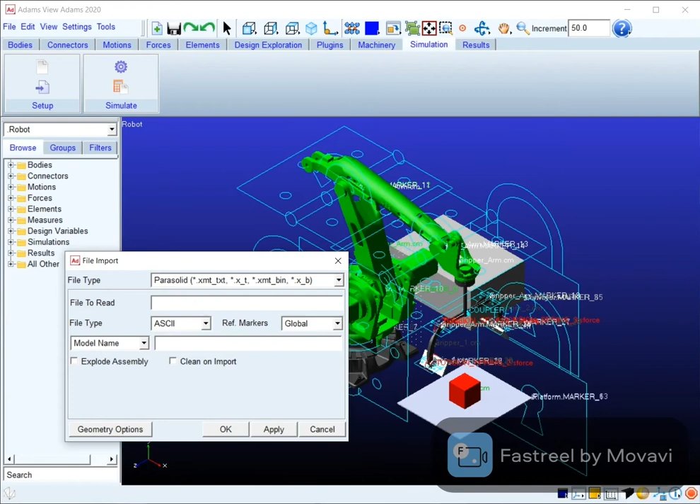So how did we import? We simply select file, then select import, and the file type should be Parasolid. Basically, the file on SolidWorks was saved in the Parasolid format. So here we will import the Parasolid format. It is much easier to use the Parasolid format. So here it was the robot assembly which we imported in Parasolid format. We have already done that.

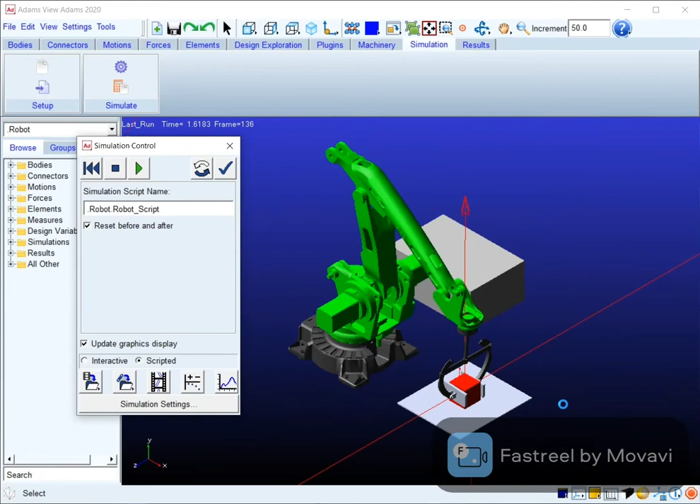So before moving on, I'm just going to show you how the simulation works, and then we'll see each individual procedure which we took to achieve this simulation. So here's the simulation. It's basically a pick and place robotic arm with four degrees of freedom. It picks the box from a platform, drops it onto the conveyor belt, and returns to its original position. So you can see the movement of each individual component. So we'll start with how this actually works.

So before starting anything, we have here the bodies which we can easily see. They were built on SolidWorks, so we don't have to build them again, which makes our work much easier. Before moving on, we just have to select the material for each individual body part. From here, we right click, modify and select. We have already selected steel. The whole robotic arm will be of steel material. We do this procedure for each individual body part here: gripper, lower arm, upper arm, swing, gripper arm.

After this procedure was done, we move on to connectors. Connectors are an important part. When we developed this assembly on SolidWorks, we didn't establish any joint connections between these bodies. Joints tell you about the degrees of freedom with which your object will move. We have three ground joints, which ground the base, the conveyor platform and the platform on which the box is lying. You go into connector settings and select create a fixed joint, then pick a first body and a second body. For example, the first body was the platform, the second body was ground, and the type is fixed. That was joint 1; joint 2 and joint 3 are also grounded joints.

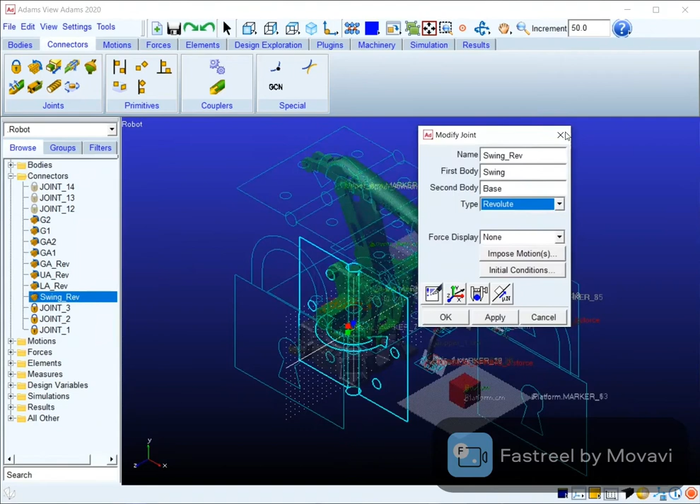Then moving on, we need revolute joints. Like in the simulation I showed you, the swing was rotating about the y-axis and the arms were rotating about their axes, so we need revolute joints for this. We select create a revolute joint, like we did for the grounded joint. We selected swing rev: the first body was swing, the second body was base, and the type was revolute. Another was between the lower arm and the swing, then upper arm and swing, gripper arm and swing, and a couple more revolute joints between gripper arm and gripper 1, and gripper arm and gripper 2. So this was done for the individual bodies.

Now we've established the joint, but we haven't described the motion yet. So for that we'll go into motion setting, and I'll show you what we've already done, basically the motion we've set up.

We're gonna select this rotational joint motion, applicable to revolute or cylindrical joints. We've already selected this, I just want to show you how it basically works. This is the joint motion, we named it swing motion, joint was swing revolution, and joint type revolute, which was already default selected.

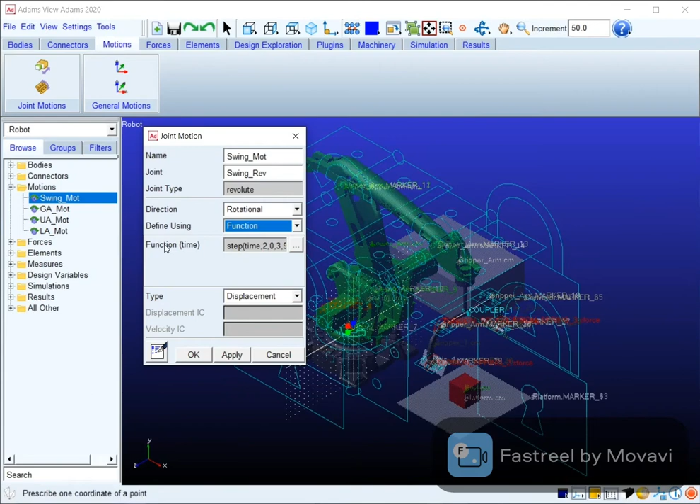Direction rotational, define using the function category. So function name was this. I'll show you how the function is basically selected. We select step category and then click on to assist. Here we have an independent variable x.

So we'll plot our functions, the graph and all that against time. Here we just write time, and it's asking about the time at which it's gonna begin and the time it's gonna end. So we'll write time, for example 0 here, and at what time it will end the motion, at 3 it ends, and the initial value is the function value.

Basically they're asking about the position: what will be the position of your joint at time t equal to 0, and what will be the final position at time t equal to 3. So we've already done that.

You can see here h naught at 0, and x1 as well. Basically x is the independent variable, here we have time, and x naught is the initial time which was 2, and the initial position was at 0, at rest. X1 is the time at end which was 3, and h1 is the final position which we have given, 90.

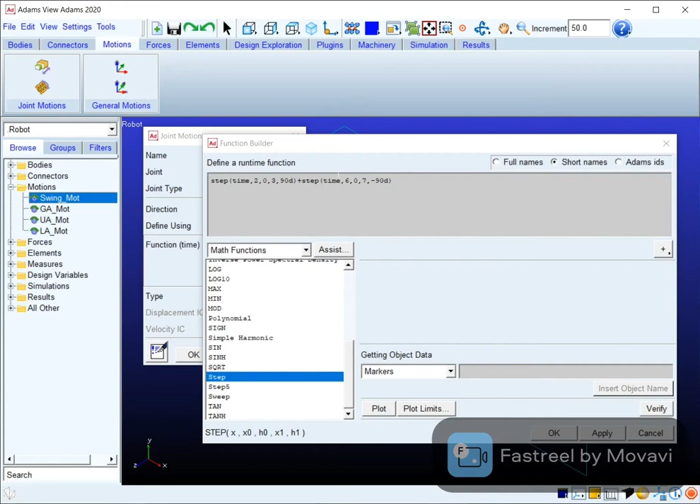This function was basically the swing function here, as we saw earlier how swing was working. Swing was rotating 90 degrees about the y-axis. So this step function was to rotate 90 degrees, and this step function was used to return it to its original position. We've seen how this step function is gonna work.

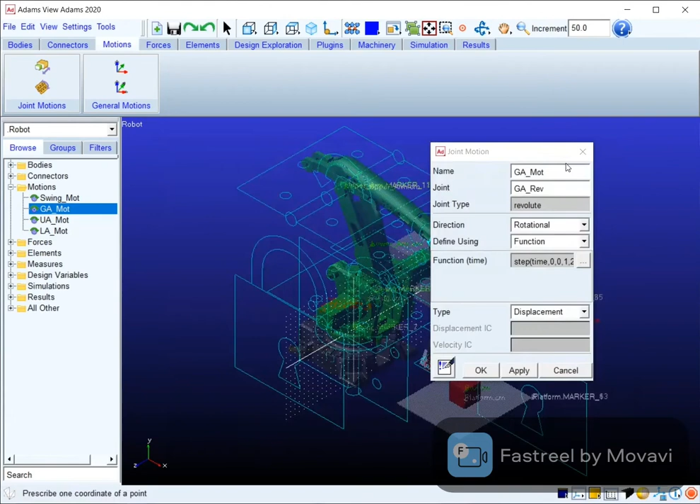We did the same procedure for every other revolute joint. This was the gripper arm revolute joint, so these were the step functions. Basically we gave step 1, step 2, and step 3 to return it to its original position. Similarly, we did this for the upper arm and for the lower arm. So that was it for the motions.

The four motions which we gave: this was rotating 90 degrees, this arm was rotating about this axis. Now you can see the arrow keys which are also depicting the direction of motion. So we've seen bodies, we've seen connectors, how they were established, and how the motion was established.

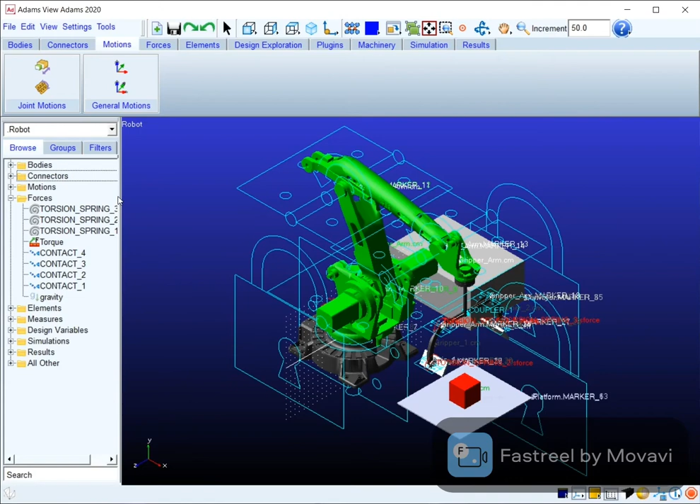Now moving on to a very important part, the forces. Now we have these four contact forces, one torque, and three torsion springs. So we're going to see them one by one. Basically, the contact forces were required.

We're gonna select force contact. The contact forces were required because the gripper arm, when it grips the box, basically exerts impact forces onto the box. The box in turn is exerting impact force on this platform. The box will be placed on the conveyor belt in the future, which will also act with impact force. So we have to establish these impact forces.

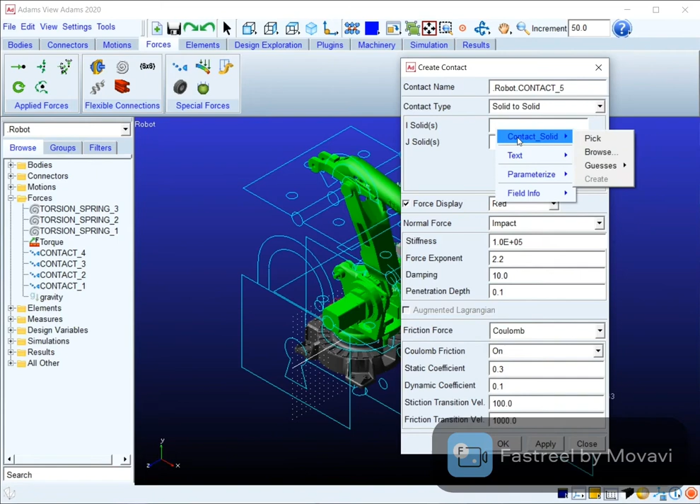So what we have to do, we just have to select create a contact. Here we have a create a contact category, we select the solid to solid type. Basically, we have all the material body parts which are solid. Here we're gonna select the solid part which we want, and another solid body.

I'll show you, we've already done that. This was contact one, which was between solid 27, basically the box, and solid 33, basically the platform. So we basically select solid to solid, the impact, the normal forces impact, and the stiffness.

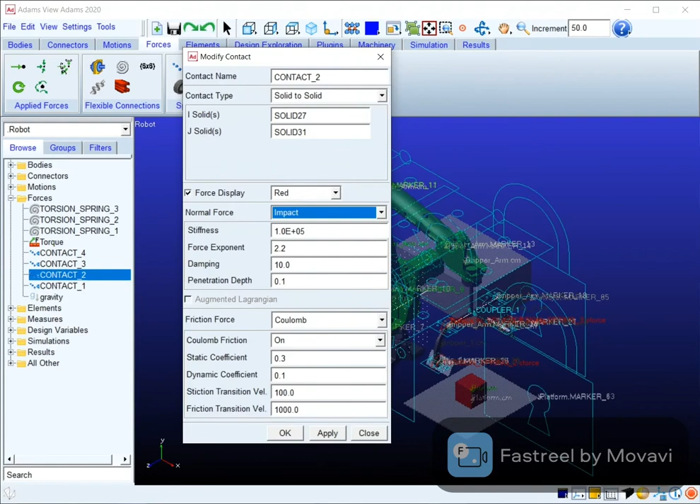These were the values we gave here. Similarly, this was done here again. This is the box, this is the gripper arm shown in white color, and then again the box and the other gripper arm, and the box and the conveyor platform. So this is how the contact forces work.

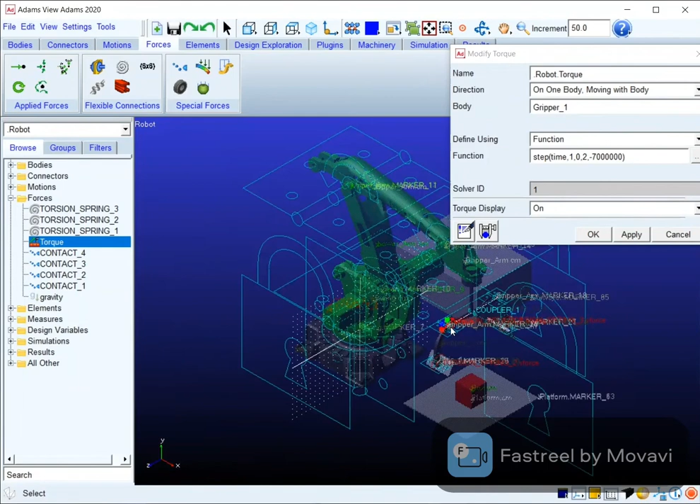Then we establish our torque here. You can see it, let me zoom it out for you. So we have a torque applied here. This gripper arm will be rotating about its axis, you can say the x-axis, and then it will grab the box and place it onto the platform. So for that we have to give the torque.

So here we modify the torque, we have established the torque. However, we only establish the torque for one end, and for the other end we'll use the coupler category. So here we see a coupler category, we just select and modify. Basically, we don't have to apply torque for both ends, we just simply apply torque on one end, and using the coupler command we can also apply torque on the other end. Basically, it acts as a couple.

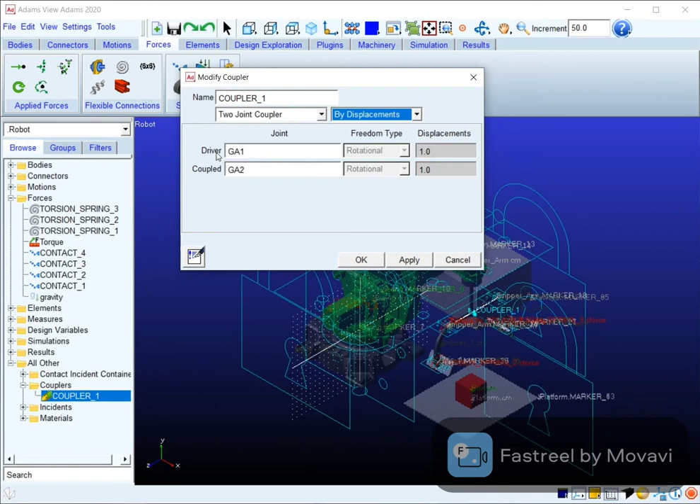When two forces act on a perpendicular distance, they are called a couple, so a kind of coupler acts like that. Two joint couplers were selected here by displacement. The displacement was given. The driver was GA1, about which we applied the torque, and the coupled one was GA2, about which we haven't applied the torque. So this is how the torque category works.

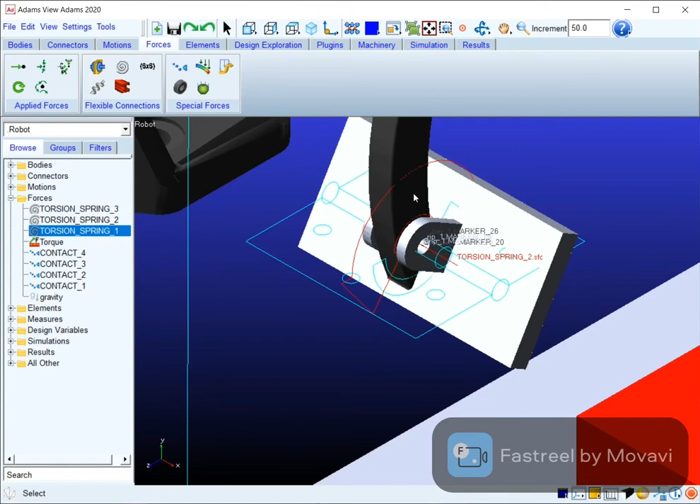Then moving on, we applied a torsion spring to the gripper arm, between the gripper arm and the gripper. Similarly, the torsion was applied between the white plate, for visual impact, and this gripper, you can say our gripper arm. Basically these are grips or gripper arm, we have named them very similarly, so it kind of creates confusion. This is how we established three torsion springs.

So that is it for the forces, and then everything is done. The bodies have been established, and all the conditions have been given. The materials have been selected. On connectors we have given the joints, and for the motions we have established the motions as well, how they're going to move. The forces category is also done. So everything is done till now.

Now we'll move on to the simulation part. For the simulation part, we just select simulation here, and then move on to settings. We already have a simulation report script name. We just want to show how we went about that. Here we select the end time, whatever will be the end time of yours; we have the end time at 5 seconds. Here we select scripted, then simulation script, and create.

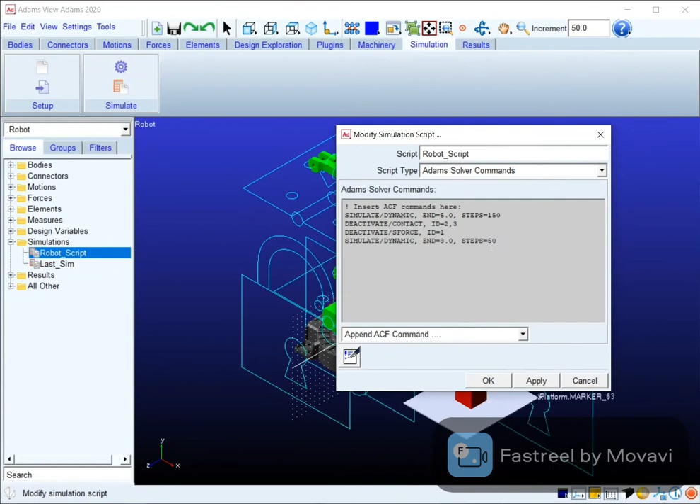So here we have a robot sim script one. We already created the script for the simulation, so we're just going to see how this works. When you open it, the script name you can name whatever, and the script type is Adams Solver commands. So this was selected as Adams Solver command, and from this drop box we selected append ACF command, which you can see here inside the Adams ACF command. Then we simply write the simulate function: deactivate contact, deactivate, simulate dynamic, end time, and the steps. This can be edited according to our own situation.

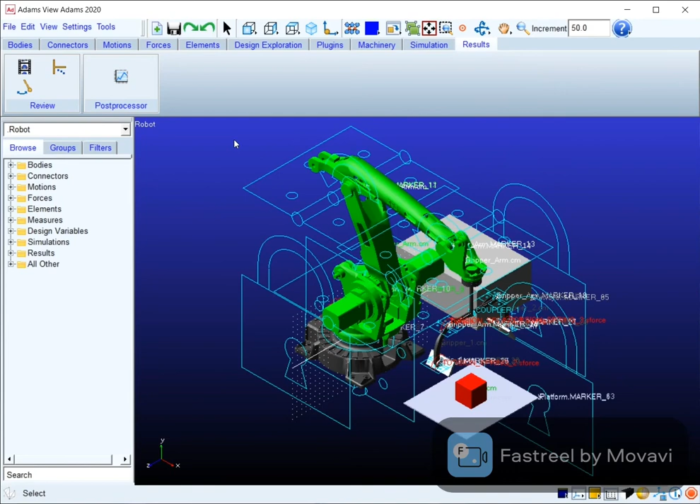However, this was required here, so we just simply put our commands here, the steps and everything. You can select activate, deactivate, whatever command you want. We have deactivated this command, and deactivated this one too, so we simply select this command, and that's how the simulation part was done. Now we're going to see how the results are obtained. We simply select a post processor, or you can simply go to simulate, and here we have a plotting option. Simply select this, and we have a plotting window opened.

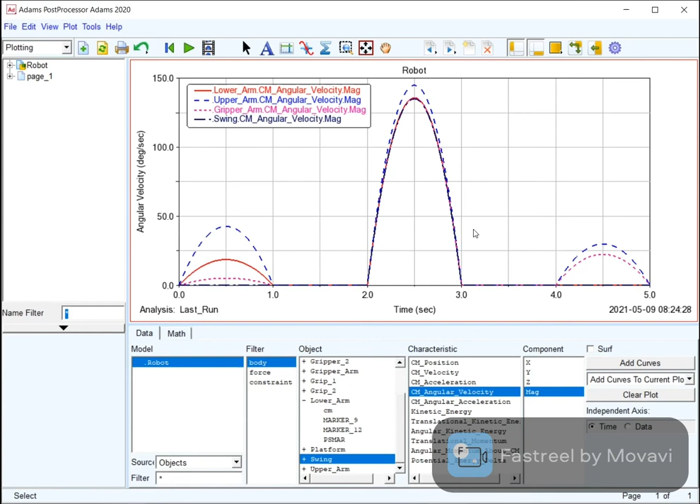I did the same procedure for every component. For example, I've plotted graphs showing the upper arm, gripper arm, and lower arm's angular velocity, angular acceleration, and position. You can also see the x, y, and z values. These graphs were plotted and can be found in the result section of the report. So this was the plot for the bodies.

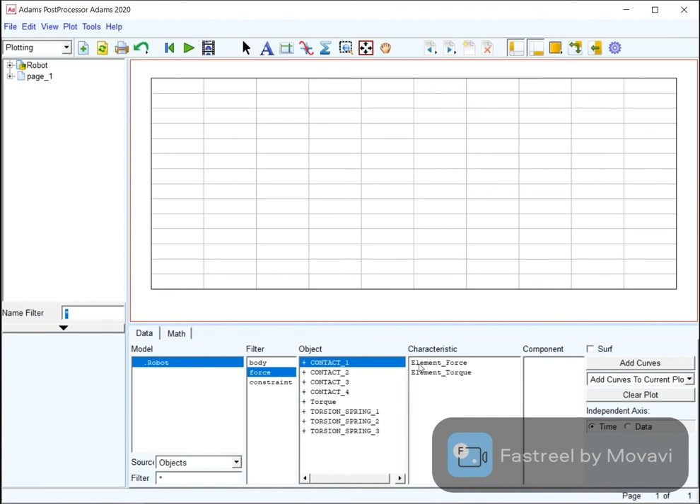Moving on, we have another category: force. If we want to see how the contact force or impact force was varying over time, we select contact 1, or contact 2, and element force magnitude, then add curve. This shows how the force varied with the passage of time. We can plot contact 3 on the same graph, or on another graph if preferred. This basically represents the box and the conveyor.

You can see that until almost 4.7 seconds there was no force, as depicted by the graph, and there was a sudden force when the box was placed on the conveyor belt. There was a sudden force felt by the conveyor belt. All these graphs can be found in the report.

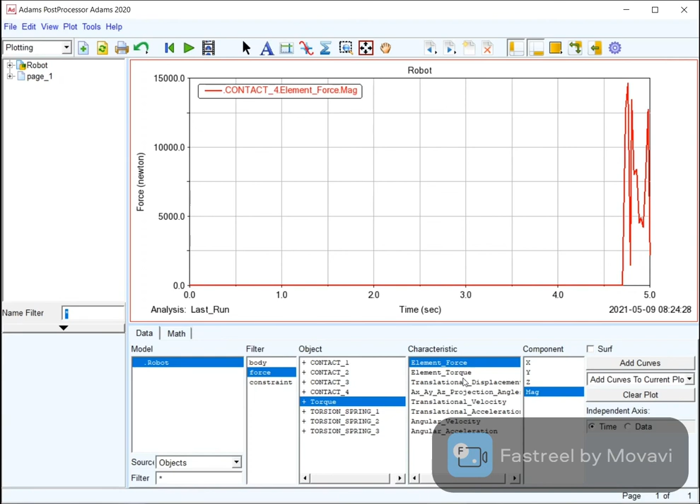Torque was also applied, so we saw how the magnitude varied with the passage of time. This depicts the step function we used to define the torque, similarly for torsion and every other system.

Moving on to the third filter, which is constraint. Here we have many categories, like the motion which we applied on the joints - you can find them here. These are the joints' motion, and these are the motions we applied onto the joint. So I have plotted the graph for motions, for example the angular velocity.

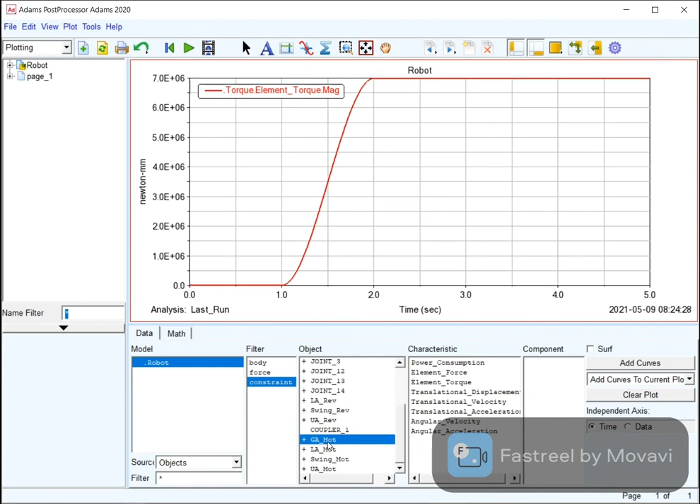How was the gripper arm's angular velocity varying? Similarly, I have plotted the lower arm angular velocity and the upper arm angular velocity. This can be found in the result section.

Yeah, so this is how the plotting was done. Earlier we saw the simulation, and now this was the plotting. This is how we achieved the simulation part on MSC Adams and worked out the software-based calculation of the graphs.

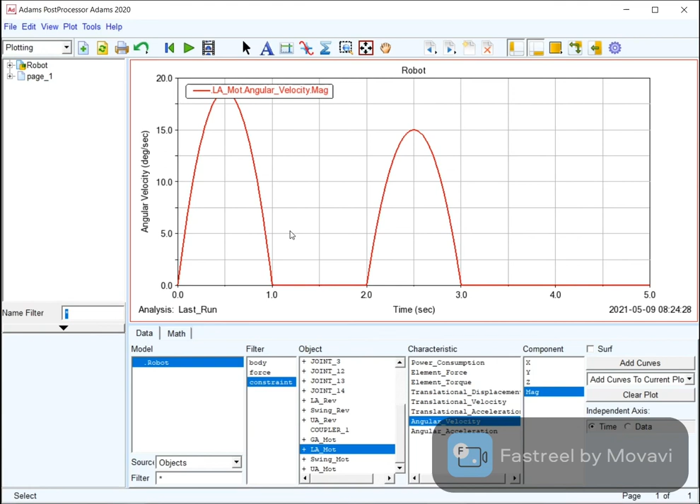So that is it for today. Hope you have understood all the procedures and steps shown in this video. These steps can also be found in the report - I have already taken screenshots of the steps and pasted them into the report, so those steps are also available there. If you haven't understood anything in this simulation video, you can refer to those documents. Thank you.